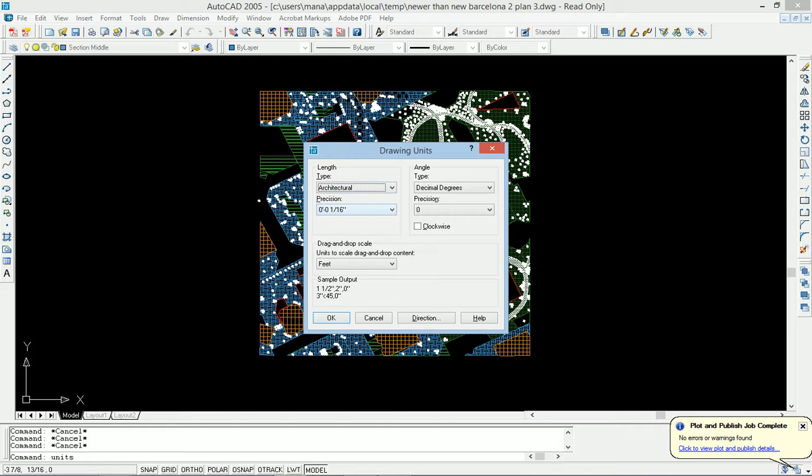So what I'm going to do here is switch this to architectural. This should be architectural, this is fine, everything else can be in feet. So we're going to hit OK. Next thing, we're going to go ahead and figure out what this is.

So we know this should be how wide? 1,320 feet. We're drawing 1 to 1. The final output needs to be around that. So I'm just going to draw a line.

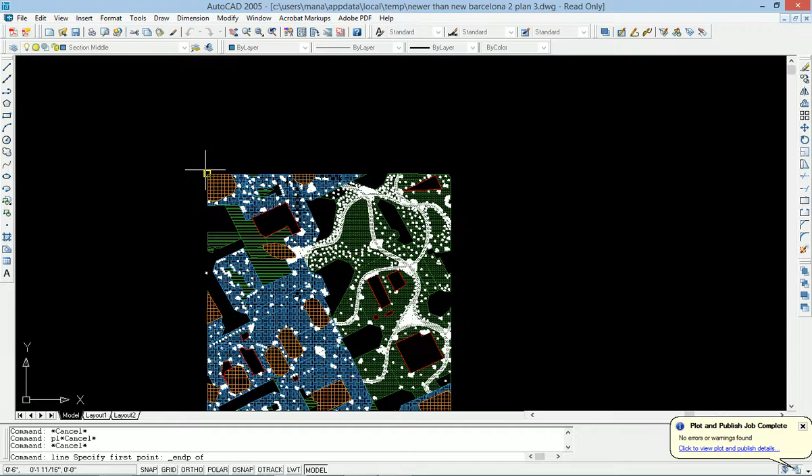I'm just doing this because I don't have good corners, so I'm trying to find some good corners. Okay, so we know from that edge to that edge needs to be 1,320 feet, right?

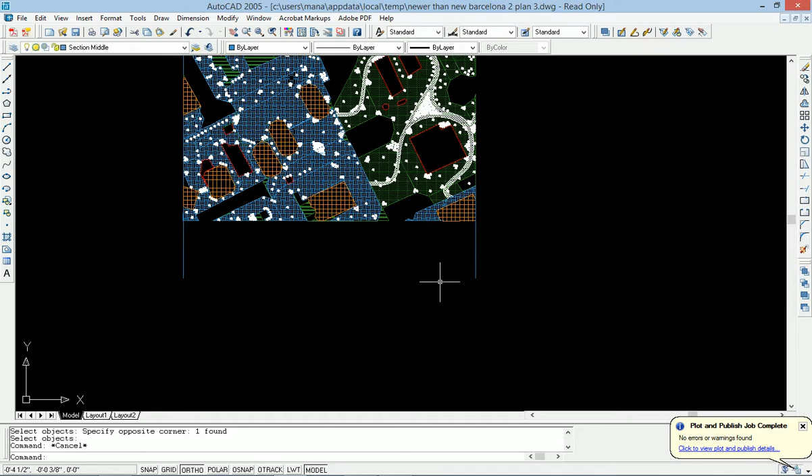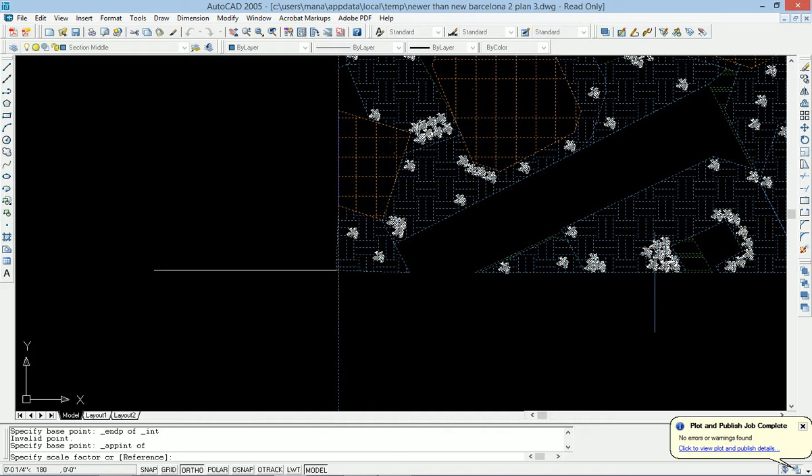So I'm going to do a scale, select everything, pick a base point, which will be this point here. I'll just pick an intersection for now. Apparent intersection, okay, and then we're going to do a reference, R for reference, and reference a length. So we reference that length, and then I'll type in 1320 feet. Enter. And zoom extents.

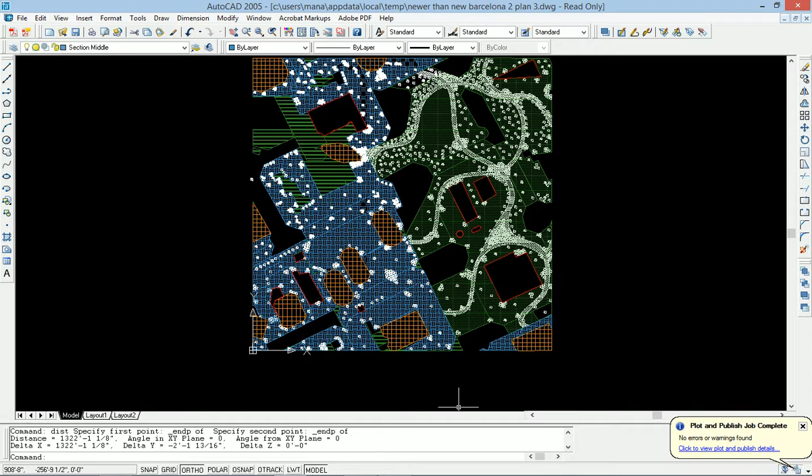If I check the size of this, it will be approximately 1,320 some feet. It's a little bit wider because of the hatch pattern. All right, so now I'm on the way to making a good plot.

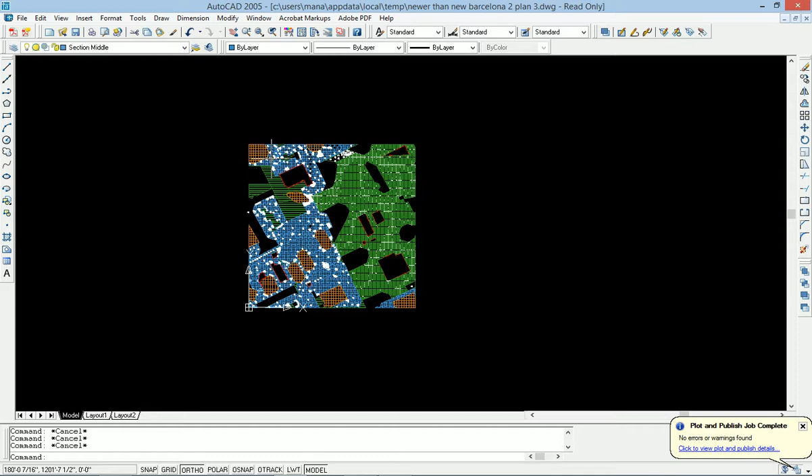Okay, so the problem you guys are doing, this is the way I work. I'm telling you the better way. I like to work the fastest, best way. If there was something better, I would have figured it out by now. I don't want to sound arrogant, but I've been doing this way too long, and I've been doing it under serious pressure trying to get drawings done, basically producing what you guys do in one semester in one night. Trust me, I've done this many times.

Now, the one thing you're going to run up against if you're working from Rhino into AutoCAD is colors and layers. So we want to standardize some things. Now you don't have to do this, but the only thing is, you see how the colors, these are hard colors to track.

So layer 0, we want to switch that to white. I don't think there's anything on 0, okay, it doesn't matter. Orange, we might switch - you don't want to use true colors, we might switch it to yellow. Although that's a section cut, sorry, section cut, let's work in the AutoCAD colors. So if we go to index color, from 1 to magenta - magenta is your darkest, red is your lightest. This is pretty standardized.

If you go into any office, this is the way they're going to be working. So magenta should be our cut, that's going to be our darkest line. Section light, I assume that's our lightest line. We're not going to use true color, we're going to use index - we can make that yellow, we can make it red. Section middle.

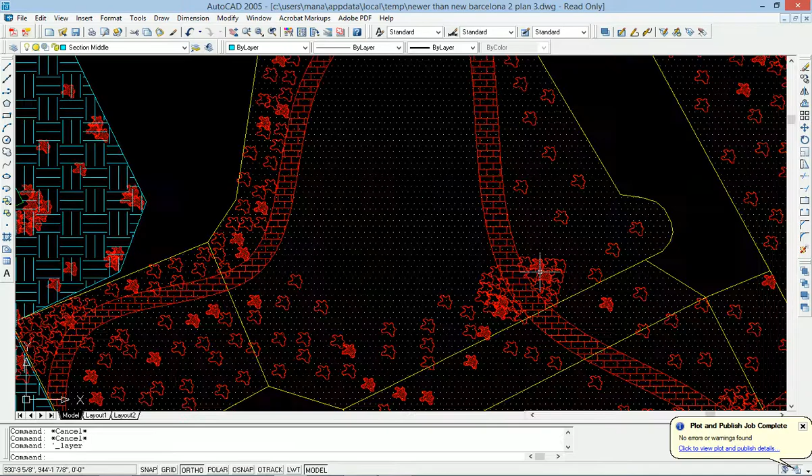Now let's see what this does. I'm sure it's not the end of it, but you can see all our colors changed. Now this is section middle, so this is like the middle. This is lower, obviously. We might need to add information. Let's start with this, and then we might add more info. Okay, so we understand these are our cuts.

So this is good. So the next thing is I'm going to start producing PDFs. Now, for those of you that don't have Adobe Acrobat, because you need professional, there's ways around this. And the ways around this is to set up an EPS printer, so you just print basically EPS files which are native to Illustrator.

So if we go under Plotter Manager, there's an Add a Plotter Wizard. This will take us to a step-by-step, and what we're going to do is make a virtual printer. It's on my computer. And what we're going to do is pick Adobe PostScript Level 2.

This is basically making a PDF, but it's making an EPS. We don't have to worry about that. Just hit Next. This is virtual, so we're going to plot to a file, not a port. Then we call this 'EPS output,' say Illustrator, whatever, so we don't miss it, right? And then we finish. So now we just made an EPS output Illustrator plotter.

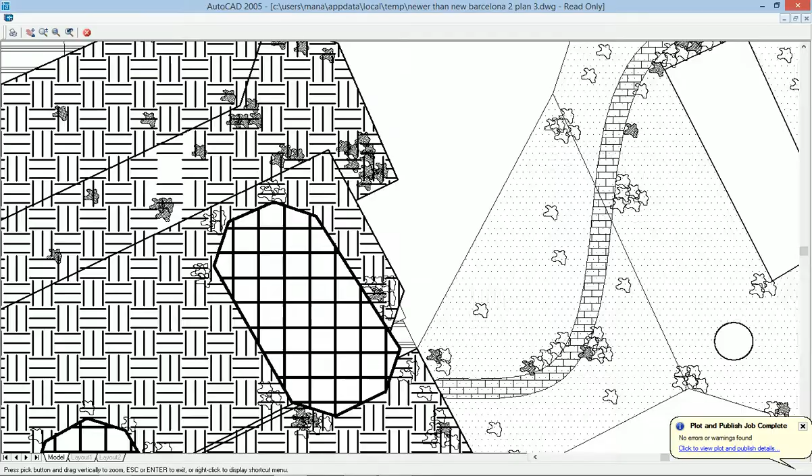Okay, so if I preview this now, I'm going to start to see my line weights. This saves a ton of time. Okay? All right, and I can adjust it.

So I can say, you know what, I don't know, maybe my cyan's too dark. Maybe it's okay. And then we'll hit OK. It's going to prompt me to save this file. Let me just throw it on the desktop. That's an EPS, it's going to save this EPS.

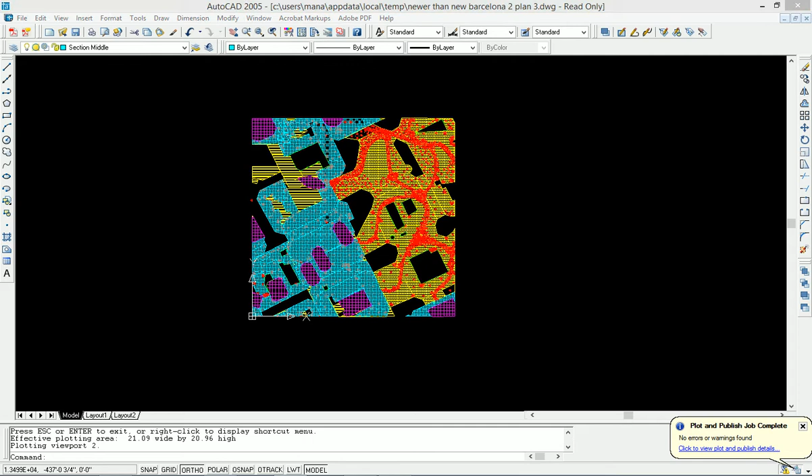If I then go into Illustrator, I use Illustrator, don't get me wrong, I do use it, but it's not accurate, and we're eventually building models out of this stuff. You guys want to plot stuff accurately.

So how would I deal with this? How would I lay this stuff out in Illustrator? The first thing I'm going to do is open that up and just take a closer look at it.

So you can see I can open it up straight into Illustrator. It's an EPS. EPS is basically a standard file for Illustrator.

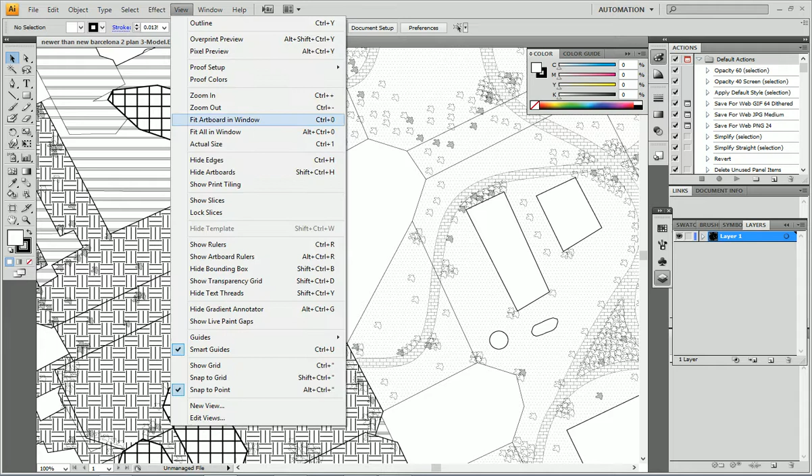Okay, the one thing, it obviously had a hard time with the artboard. No big deal, right? It sort of has it rotated potentially. I don't know, it's the right setup. They had a problem with the artboard, like didn't know how to deal with it.

Doesn't matter. One thing I can do is get rid of all the educational crap. And you don't want to use that one, you want to use Direct Select, which is the white one. And try to do a good job selecting it.

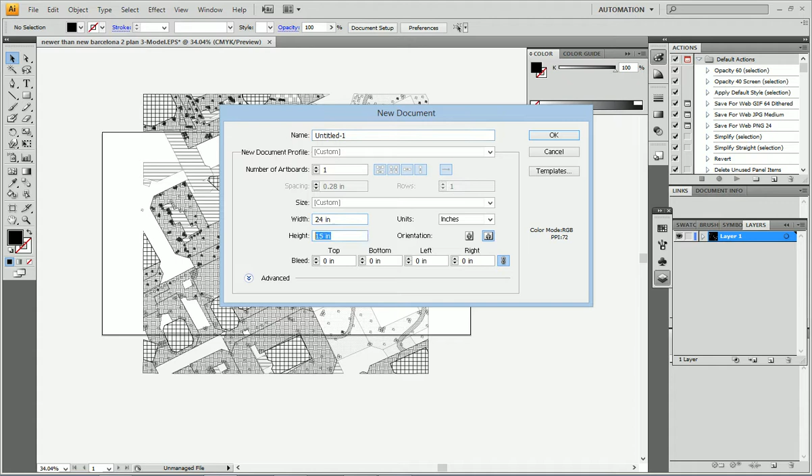Okay, we then can set up a new drawing, and this is where we can set up our width, right? So our width is going to be 24. Say our height's going to be 48 for now, right? Because we're going to put a section underneath.

We select all of this. You can just say edit, copy.

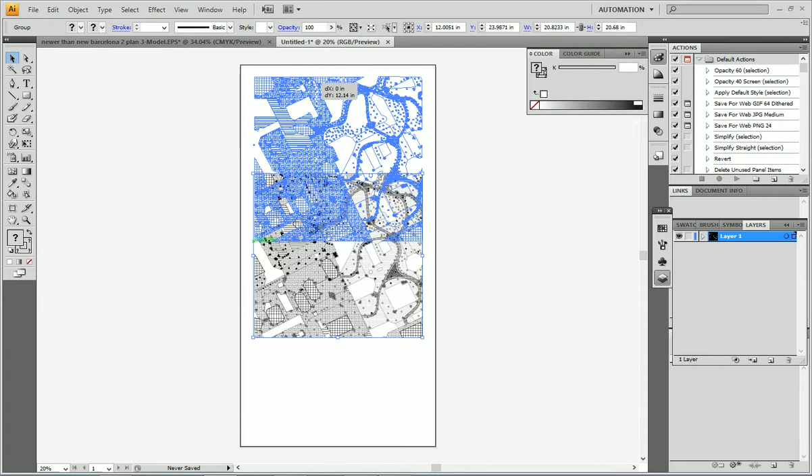Not the fastest machine in the world. So, edit, paste. There it is. Move it in position. I'm a third of the way there. I can plot it. It's 1:30, I can get a drawing out by 2.

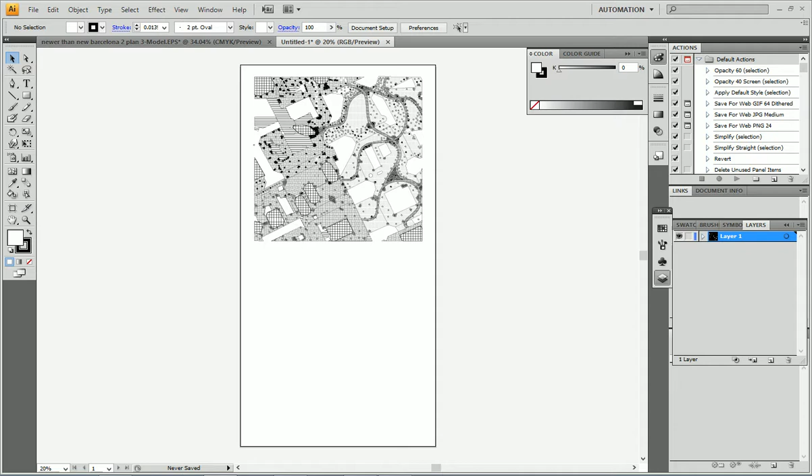You guys can't, okay? Don't try to be a stunt person, you've never tried to be a stunt person. All right, so I don't have to do anything to this, it's ready. You want to do all your work here where it's easy. If I had to go in here now, I don't know what you guys are doing, are you individually going in here and drawing over this stuff? How are you dealing with these files?

I'm not sure how you do it in Illustrator. I know how to do it, but it's not going to be easy, it's going to look bad. To do Illustrator the way you need to do it takes a lot of skill, and you guys don't have it yet. AutoCAD is like the easiest sort of software for you right now.

So you can go—this is a file from Rhino, right? 2D, yep, made 2D, hatched it in Rhino. I hatched it in AutoCAD. In AutoCAD—went back to Rhino, or you hatched it here? So I made it all in Rhino, made it 2D, then I moved it to AutoCAD. AutoCAD hatched it, yeah, and then plot it out. EPS, easiest, don't even need Adobe. Okay?

This makes sense? And then you can see you can do the same thing for the section, so the section will be right underneath it. And then you can place those. Right? So work in AutoCAD. I think no one's working in AutoCAD, but whatever work you're doing in AutoCAD, it's limited. Okay? So 2D, don't work, 3D is great. Make it 2D, bring it in AutoCAD, redraw it, draw on top of it, make new layers. Okay?

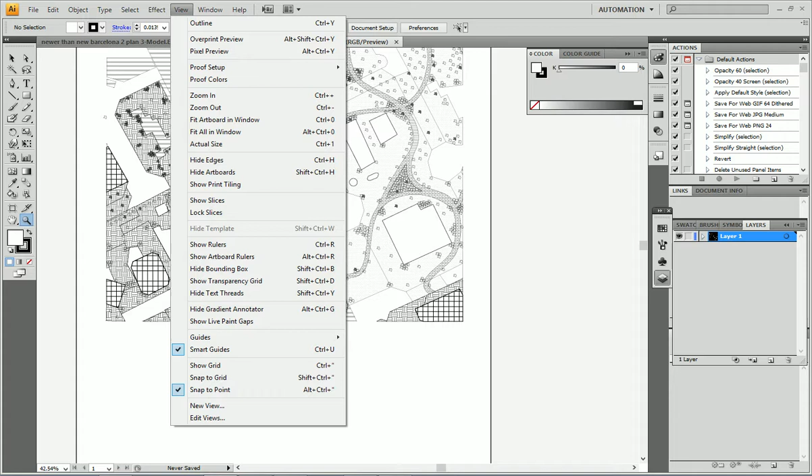This is starting to compete with what we saw on Friday or Thursday. It's the same, it looks the same. It's the same, let's look at it. It's going to be identical, so there's really no difference. So we just pick Adobe PDF, and then everything's the same. Well, you got to pick the—

So I got to go to Properties—Adobe PDF has a few more layers. Properties, then you got to go to Custom Properties, and then Paper Quality, and then Advanced, and then you go to Paper Size, Custom, and then you can make this 24 by 24. Hit OK, hit OK, hit OK, hit OK, hit OK, and you have 24 by 24.

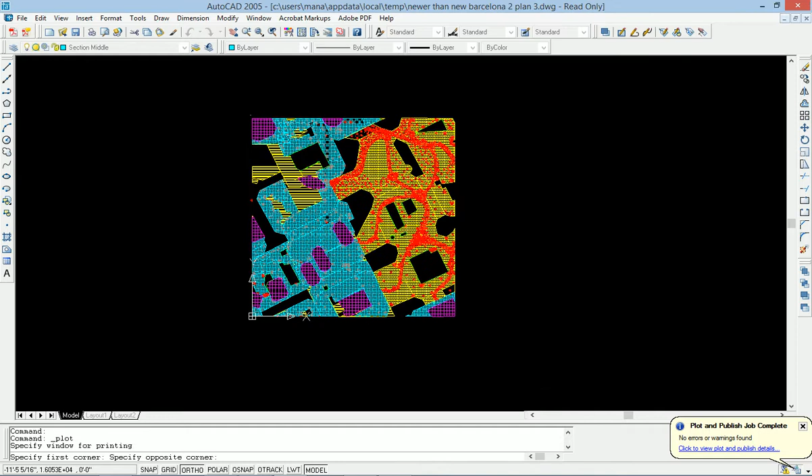Just more steps, okay? And then I can go to Window, again pick the same window, pick my 1/64 equals a foot, say center it, hit OK. Rather than saving as EPS, it saves it as a PDF. Hit save, it's going to look exactly the same. It's using the same technology.

I like the EPS because it's low tech, don't need anything. It's eliminating one extra process, it's actually faster as an EPS, as you saw. Illustrator—see, like this drawing is killing my computer. Looks exactly the same.